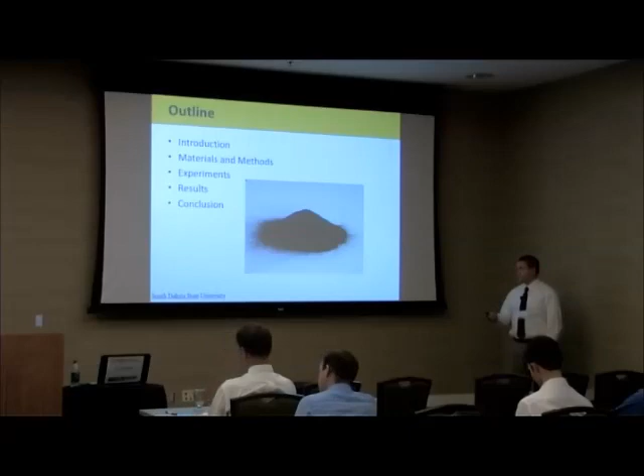So why do we want to look at biochar? Well, originally there's a high demand for alternative energy, and it doesn't seem to be decreasing in the near future. We want to reduce our greenhouse gases, and we want clean, renewable biofuels.

Unlike ethanol and biodiesel, which can only be added to traditional transportation vehicles, future second-generation technologies utilizing thermochemical conversion can actually produce gasoline, diesel, and jet fuel at much higher drop-in rates for traditional vehicles. It can also utilize a lot of inedible lignocellulosic biomass, so we don't have to compete for soybeans or corn based on first-generation biofuels.

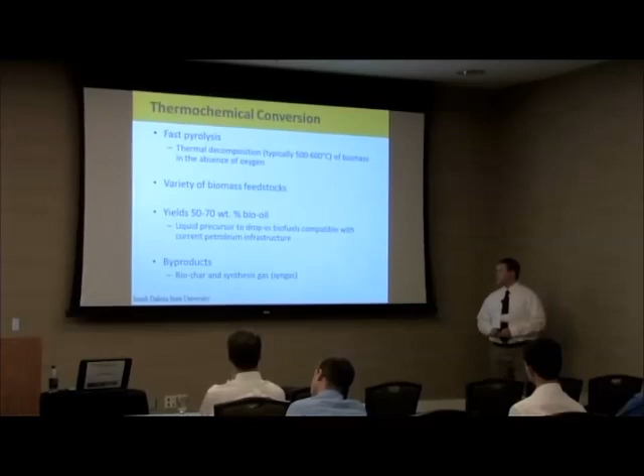Just like before, fast pyrolysis is typically the thermal decomposition at high temperatures in the absence of oxygen. It can use a variety of biomass feedstocks and typically yields around 50 to 70 weight% bio-oil, which is a liquid precursor to the drop-in fuels. The reason why most thermochemical conversion research focuses on bio-oil and kind of neglects the byproducts, biochar and synthesis gas, is that they typically have much lower yield.

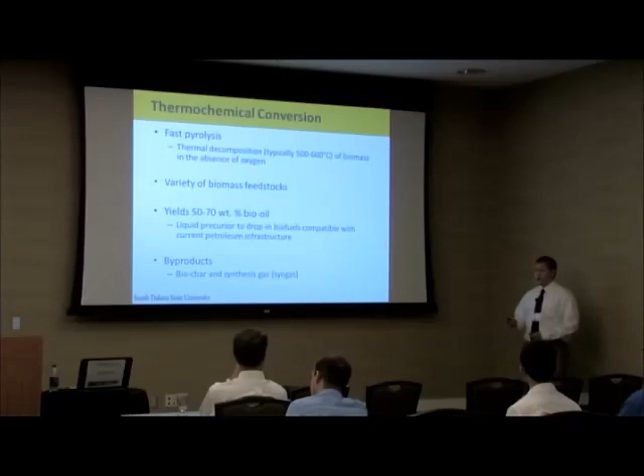Syngas is around 15 to 20% of the process, with a composition of CO2, CO, hydrogen, and methane as the predominant components—actually a majority of CO2 and carbon monoxide in fast pyrolysis. The proposed uses would be for Fischer-Tropsch synthesis, or it could also be burned for additional process heat.

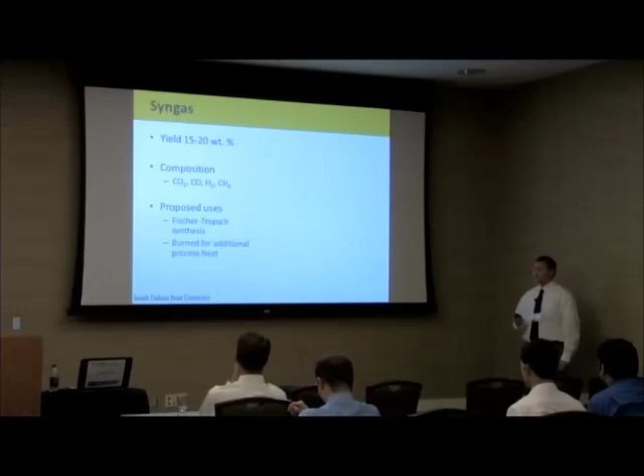But since you're not usually producing a majority focused into syngas, traditional fast pyrolysis processes look at burning it for process heat.

Biochar also has a 10 to 30 weight% yield, and it's mainly carbon that we've all seen prior to today, and it also has an amount of ash. Based on the process and the biomass feedstock, the ash content could vary from 1%, 5%, to above 10%.

We've talked a lot about the proposed uses for soil amendment, carbon sequestration, and also for some thermochemical processes, they plan on burning it for additional process heat, since fast pyrolysis is actually endothermic and requires energy to break down and thermally decompose the biomass to produce the bio-oil.

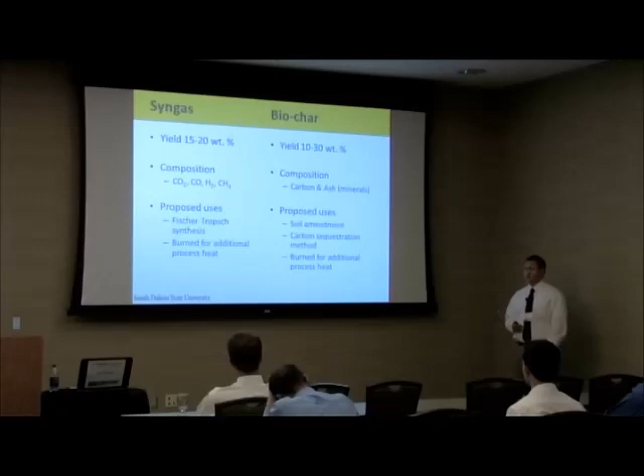So here's the typical fast pyrolysis system. Biomass would go into the reactor, and you'd have a condenser system to obtain your bio-oil. Syngas and biochar could go to the combustion system to bring back process heat for your reactor.

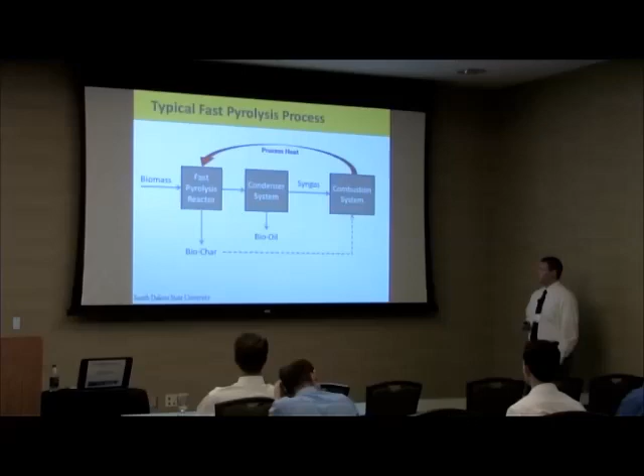For our project, we actually want to take this biochar and upgrade it into activated carbon, because another high-value added co-product would help improve the overall economic platform for thermochemical biofuels. Right now, techno-economic analysis shows it's around $2 per gallon of energy equivalent for bio-oil as the liquid precursor for fuels, so that cost needs to come down to make it more viable going forward.

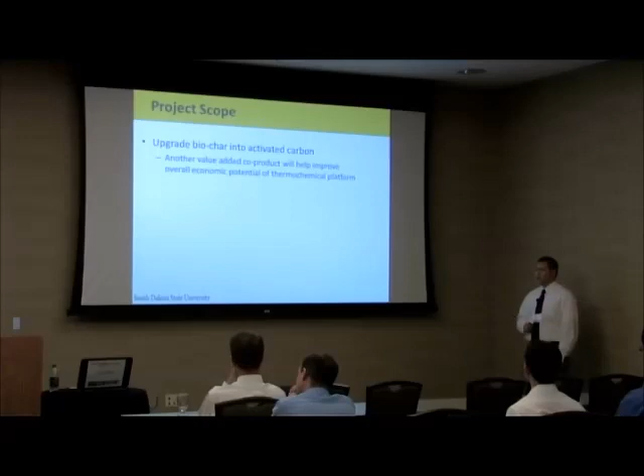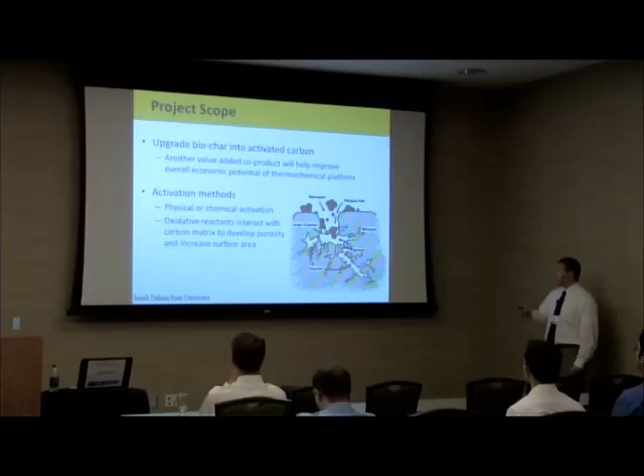We want to use different activation methods, physical or chemical activation, where a partially oxidative reactant comes in and develops macropores, mesopores, and micropores. Ideally, you'd want it to react with the carbon matrix to develop porosity and increase the overall surface area. For this experiment, we're going to be using flue gas components, CO2 and H2O, individually, together, and then also fast pyrolysis syngas.

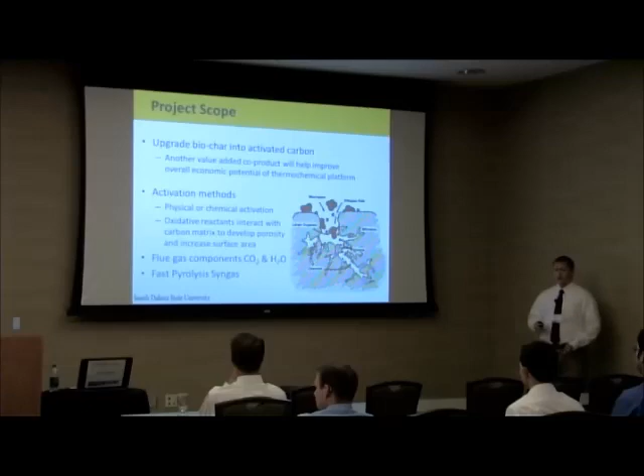So why do we want activated carbon? It's used primarily for potable water treatment to purify water. And with the increasing global population, developing countries have increasing demand for clean water.

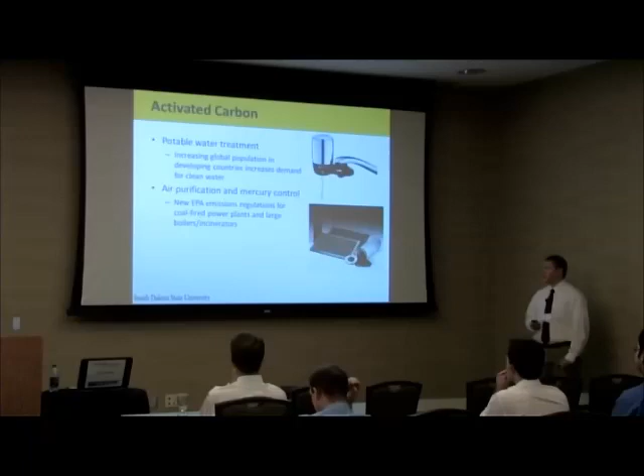Also here in the US, new EPA emissions standards are requiring coal-fired power plants to reduce the emissions and particulates being released from these coal-powered incinerators and boilers.

Based on a market analysis by marketsandmarkets.com for activated carbon, there's a compound annual growth rate of 11.1% from 2011 to 2016, which we're currently in the middle of. So not only are we taking biochar, which has a very small market—not necessarily a large global market—there already is one for activated carbon, and it's growing right now.

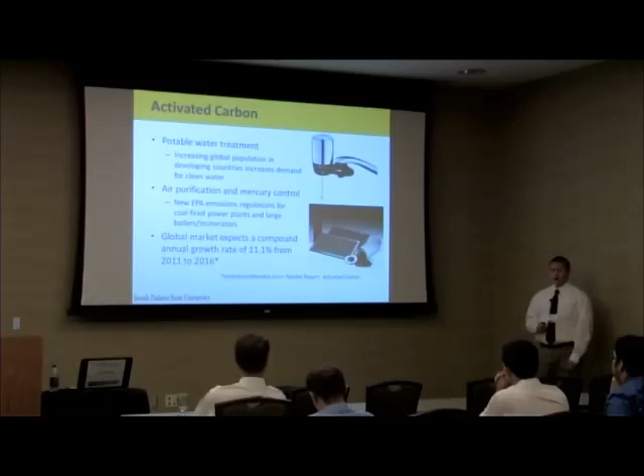For the experiments, I used a fixed bed reactor where we can adjust the temperature within the furnace. We can also have a gas inlet below the biochar, which is placed in a stainless steel mesh basket, and then the exhaust gases can be easily removed.

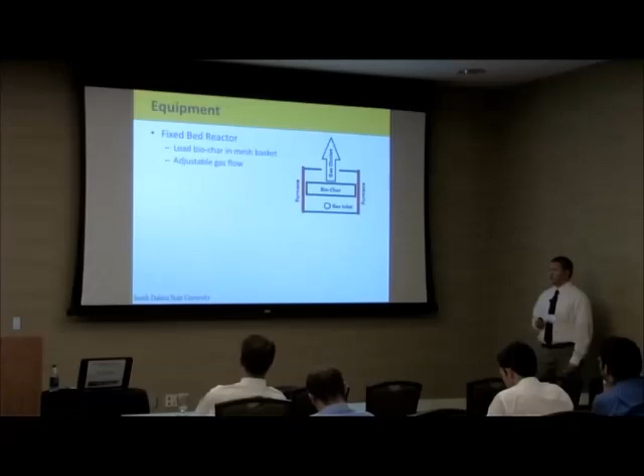For analysis of our activated carbon, we use a Micromeritics TriStar 3000. We could test 3 samples at a time for quick screening of our materials, and we primarily measure the BET surface area.

When the sample is being analyzed, it's at very low pressure under vacuum, and it slowly doses it with additional nitrogen. As the nitrogen is increased, it starts to form a monolayer of nitrogen molecules physically adsorbed to the surface. Since we know the size of a nitrogen molecule, we can calculate the BET surface area of that monolayer.

When you increase the pressure to its full saturation, you can measure the total pore volume. And when you decrease the pressure back, you get this hysteresis loop, so you could get the pore characteristics, basically the shape of the pores in the carbon matrix.

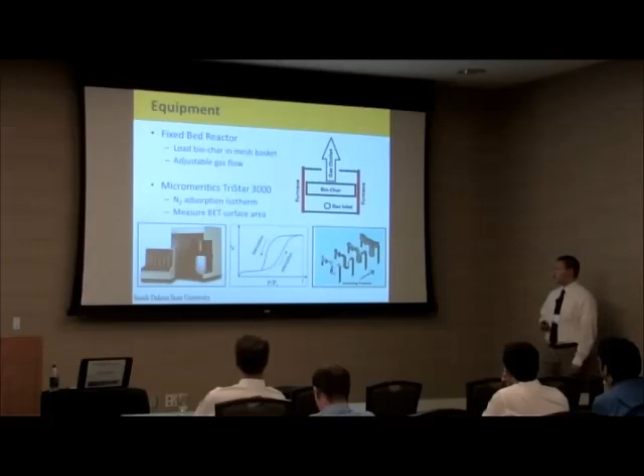For the CO2 experiments, it's primarily focused on the Boudouard reaction. The gaseous CO2 will react with the solid carbon and form 2 moles of carbon monoxide. For our experiments, we need to run at very high temperature.

Looking at the thermodynamics, at low temperatures, CO2 is the favored product. But above 675 degrees C, CO becomes more favorable, and the reaction proceeds. It's interesting, though, that our reactant will also be our product. So we want to be able to adjust and analyze, well, between 800, 850, 900 degrees C, we can get very good reactivity, but we also want to retain that carbon for activated carbon production.

Here's the results of using CO2 at 0.7 liters per minute flow rate. At different temperatures, you could see the starting biochar surface area of around 262 square meters per gram. And at different times, a larger amount of carbon is being converted to form this carbon monoxide as the reaction progresses.

Taking this further, even though you can produce a very good activated carbon above 1,400 square meters per gram, the yield that you would get isn't ideal from a production standpoint.

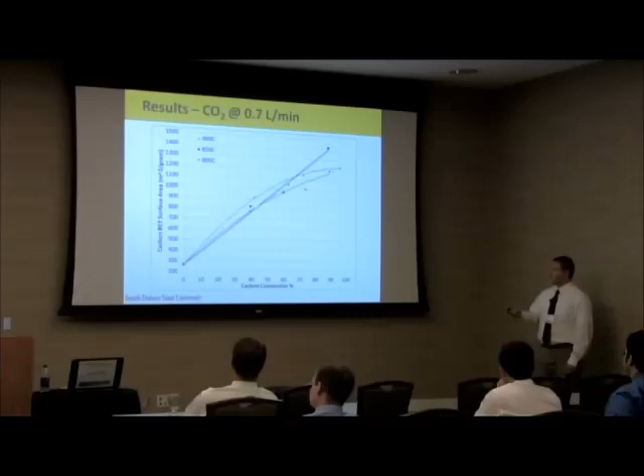You would really need to see at what amount of conversion you can produce a profitable amount of activated carbon. So going forward, I'm going to take the surface area and multiply it by the yield and have the same x-axis. And when we take a look at that, you can see that even though you have very good surface area, you're just not making enough.

Around 40% is where the optimum amount would be, where you have a pretty good activated carbon that's being produced, but you have an abundant amount of it for selling.

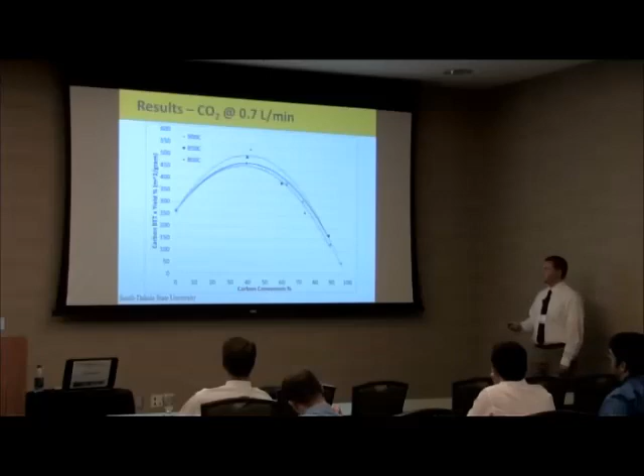So you want the high temperature to be very reactive for the carbon to react with CO2, and you also want a very low flow rate. What's happening is you're creating these pores, and then when there's an abundant amount of CO2 around the surface, you're going to be destroying the pores as well. So you want a fine balance of pore creation versus pore destruction.

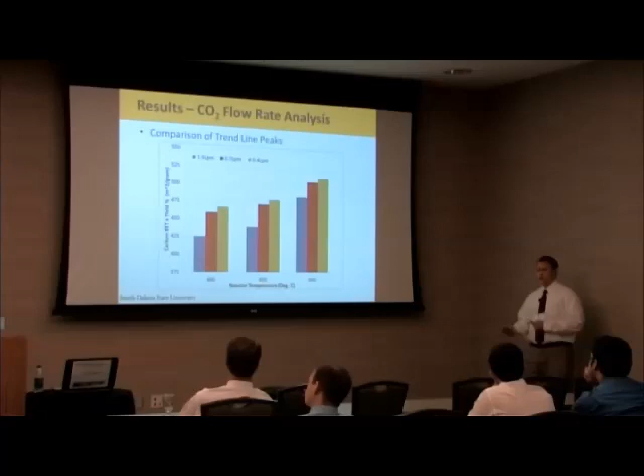Going forward, we also want to look at steam experiments using, instead of CO2, the other flue gas component of water. If we just take water and react it with carbon, we're going to have carbon monoxide and hydrogen. What's happening, though, is within the pore, 2 moles of hydrogen can further react with carbon and produce methane.

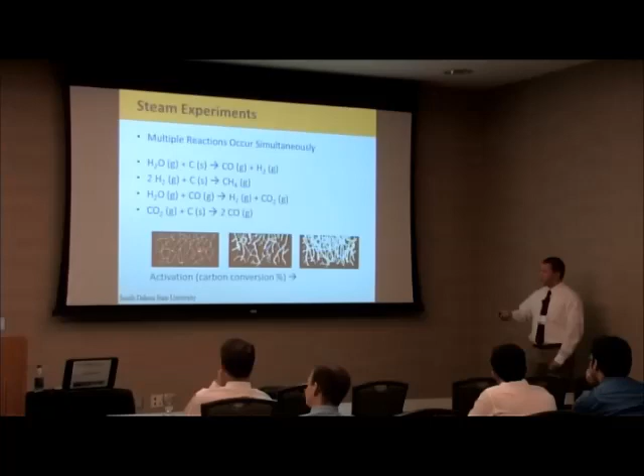The water and carbon monoxide produced from the first reaction can undergo water gas shift and produce more CO2. And just like before, the CO2 can react with carbon and make 2 moles of carbon monoxide. So steam is actually more reactive, and when it diffuses into the pores, it'll continue to react from the other byproducts of the reactions. Typically you'll get bigger pores as the activation reaction progresses.

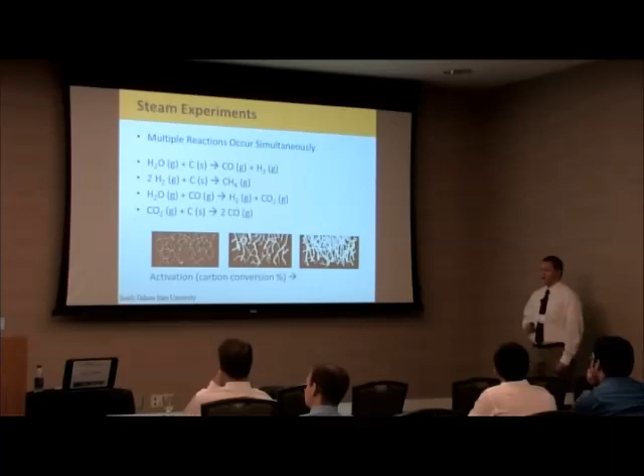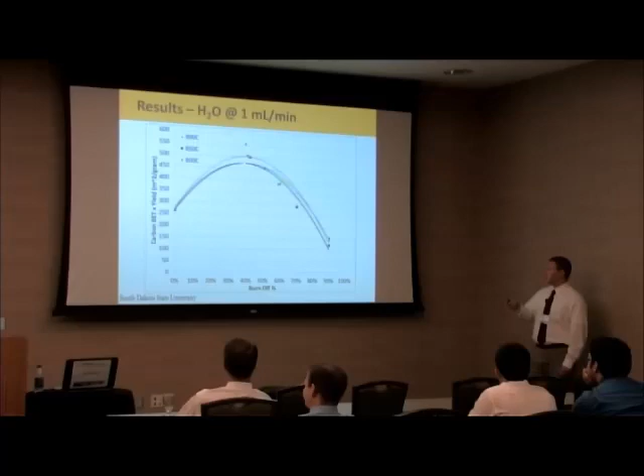Here's another plot. Before we were around 1400, we can easily get above 1500 and 1600. When we take a look at the BET surface area times yield and compare that to the burn-off, it's just like before. Around 40%, we reach our maximum peak, and 900 degrees C is very reactive as well.

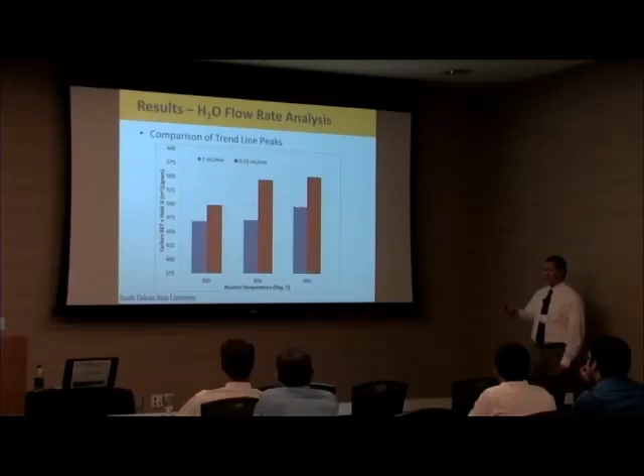We reduce the flow rate from 1 milliliter per minute to 0.33 milliliters per minute, and we see the same trend. At 900 degrees C, we reach a higher trendline peak, and at lower flow rate, we have a higher trendline peak.

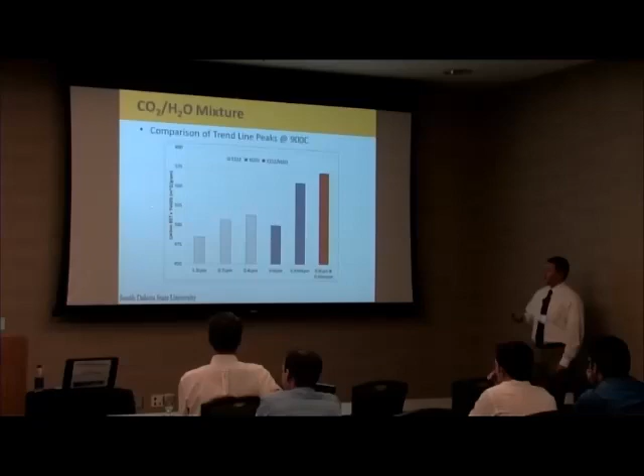This is a combination of CO2 and water together, an equal molar concentration of activating agent, where it's 0.4 liters per minute of CO2 with 0.33 milliliters per minute of water. With this we can obtain the trendline peak around 575. This is the carbon BET surface area times yield percentage.

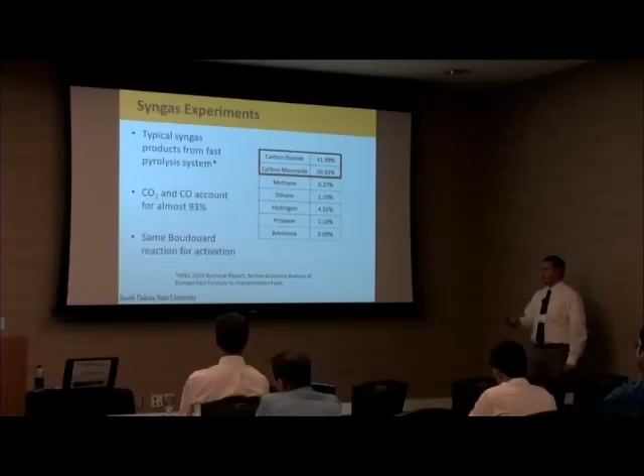Going forward, when I say syngas experiments, I focused on just using these two gases to have more of a model control over our experiments. Since CO wouldn't really react with the carbon, it's going to be the same as the Boudouard reaction using the CO2.

So we can see with the syngas activation going forward, it's the same - taking the biochar initial surface area, and we can increase it dramatically. The syngas activation will get around 600 carbon BET surface area times yield percentage.

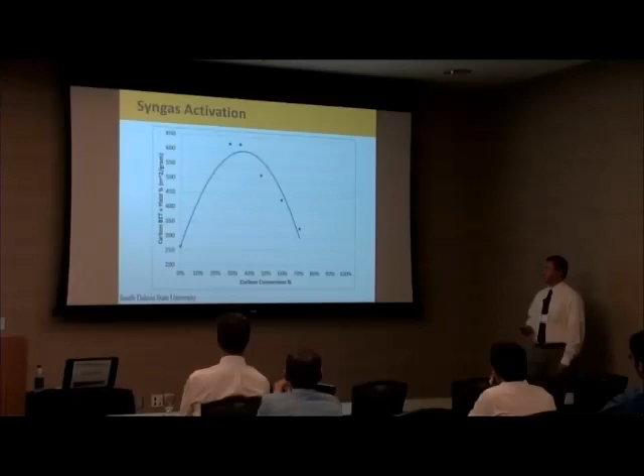Comparing that to everything else before at 900 degrees C, we can see that syngas produces the best as of right now. This is using 0.4 liters per minute of carbon dioxide and 0.5 liters per minute of carbon monoxide, the actual ratio that's similar to fast pyrolysis composition.

This is the same amount of moles of CO2 just like before, so it's directly comparable experiments.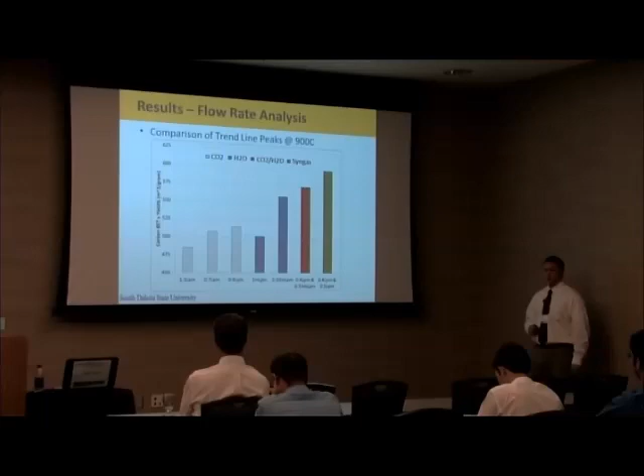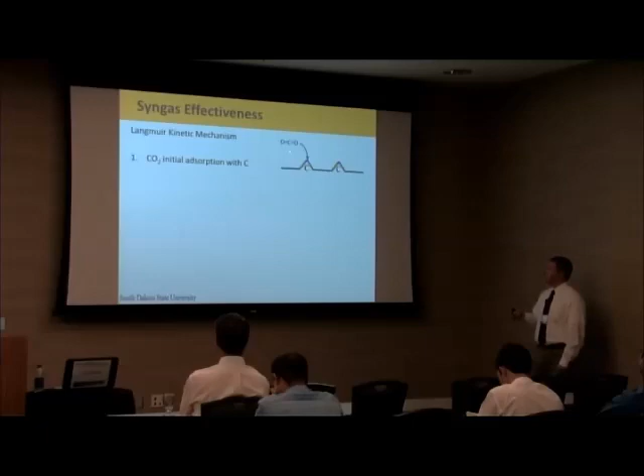We want to know, why is syngas so effective? When we take a look at the Langmuir kinetic mechanism, we have carbon dioxide right here, and one oxygen will be reacting with the carbon that's on the surface of biochar. When it does, we have a CO blockage of a carbon active site, and it prevents further CO2 from reacting where that would be.

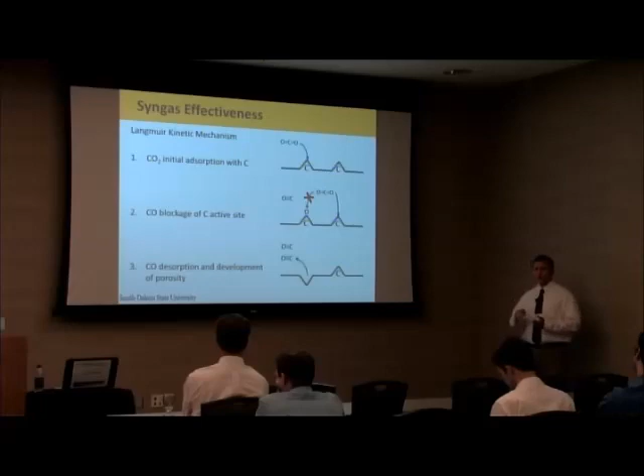Then once the carbon monoxide will desorb, we have development of further porosity. So it's going back to the beginning where we want the reaction to proceed and we want to generate CO, but we don't want to do it too much and too quickly where it will actually destroy the pores. We want to create more pores and higher surface area.

So our proposed integration of using this would be: you have your original biomass, you have your condenser system to make the bio-oil. You have the syngas, which would be first burnt to supply process heat. But then you could use the syngas and react it with the biochar in a secondary reactor at an elevated temperature around 900 degrees C.

You can have an improved syngas with higher carbon monoxide concentration. You can get additional process heat. You can have activated carbon that's produced as a result of your whole process.

And you would actually have the hydrocarbons in the bio-oil to be used for biofuels. You'd have activated carbon that would be typically worth a little bit more than biochar. And you would have even more syngas that's being burned for process heat. So you have an overall better utilization of carbon from the original biomass feedstock.

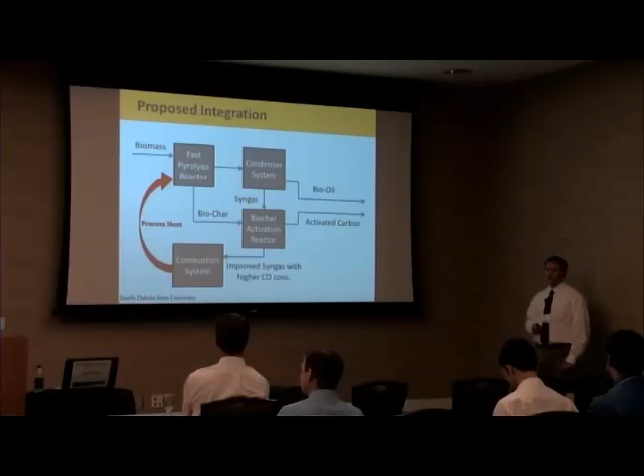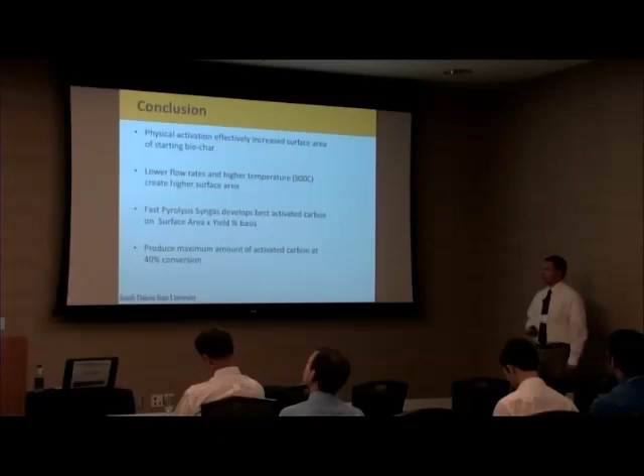Our conclusion is that physical activation effectively increased the surface area of the starting biochar. Lower flow rates and higher temperature create higher surface area due to the balance of pore creation versus pore destruction, and fast pyrolysis syngas does develop the best activated carbon on a surface area times yield basis. You could produce a maximum amount of activated carbon at around 40% conversion.

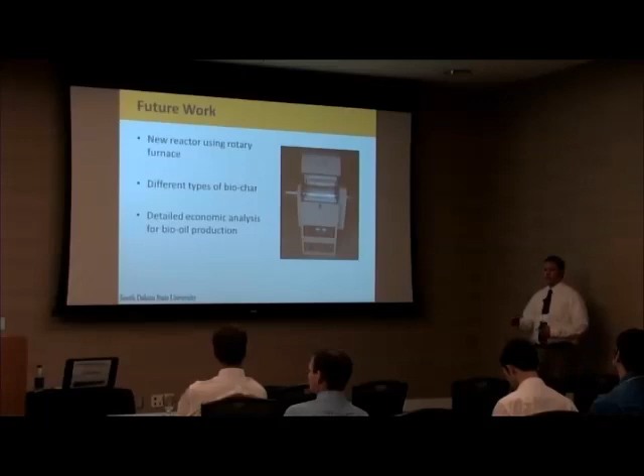For future work, we're planning to use a new reactor with a rotary furnace. Instead of a fixed bed where the biochar is stationary, a rotary bed can actually get better interaction between the gas and the carbon, better turnover, and a better mixture of both reactants. We'd also like to try different types of biochar.

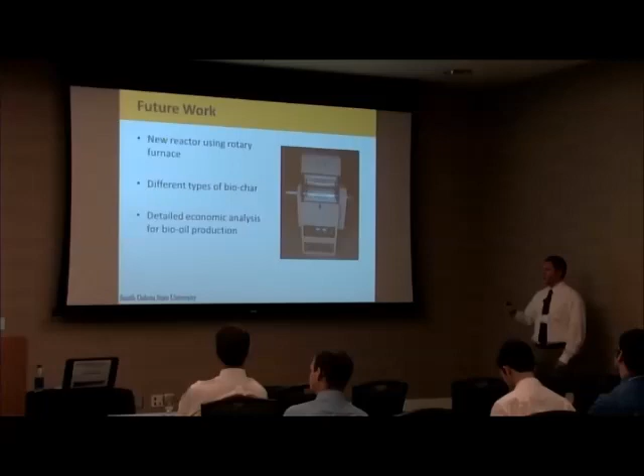The biochar we used was commercial biochar provided by ICM Incorporated, and they primarily focus on thermochemical gasification processes. We would like to go back and take a look at that techno-economic analysis and try to detail our proposed integration compared to their traditional scope.